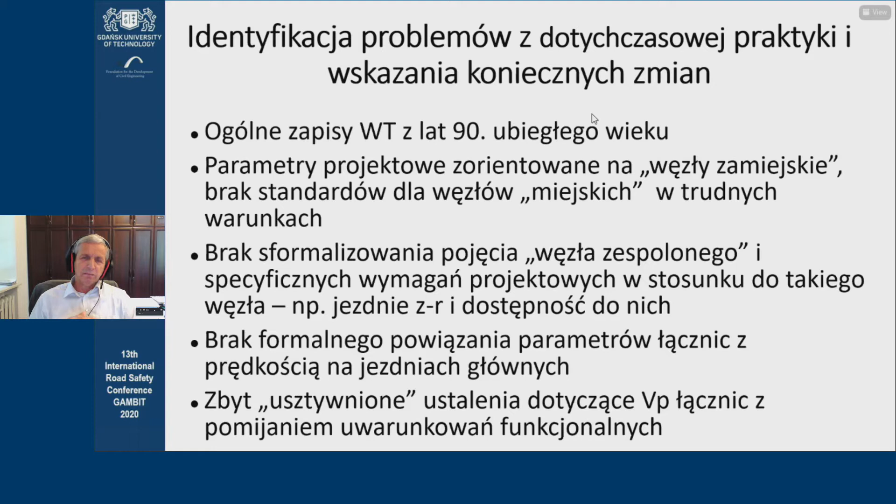So identifying the problems. Well, we really haven't had specific guidelines. Everything was based on knowledge from the 1990s. There were some design parameters, but we used the term of non-urban interchanges. There were no parameters for urban interchanges under difficult conditions. And when it comes to design speed on the ramps, the approach was really very rigid.

Selecting the type of interchange, well, there were some limitations on this. I mean, I don't see why we would stop people from designing interchanges on specific types of roads. And obviously, some boundary conditions have to be met, because what we don't want is a WB interchange at a crossing of an expressway and a motorway. But we thought that needed to be made more flexible in terms of selecting interchanges.

And then passability, again, just as with junctions, our idea is to include passability, including conditional passability. Just to give you an idea, if it's a single lane ramp, 6 meters wide, why would we make it wider if it's not needed? Sometimes it may be needed, sometimes not. So that shouldn't be a requirement.

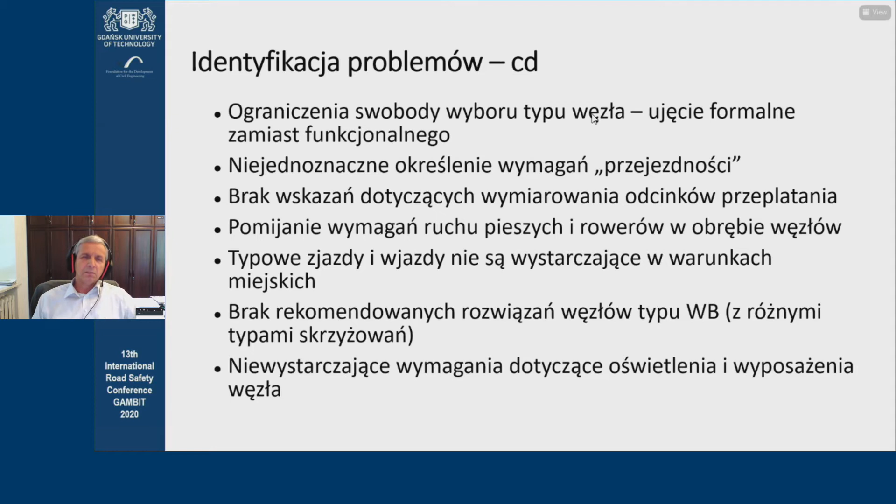And then weaving sections, it wasn't clear what dimensions they should have. And then on-ramps and off-ramps, I think what we've had, especially under urban conditions, wasn't sufficient. And lighting, that's another problem. So lots of problems, and it's based on our analyses and results of our audits, because we've conducted 32 projects, as I said, and that helped us to identify the problems and the deficiencies.

So now we have this structure. There are 3 volumes, with basic requirements in volume 1, where we list all the typical things like classification, elements, design data, etc. And then we have interchange elements and technical equipment. I'd like to tell you more about the basic requirements.

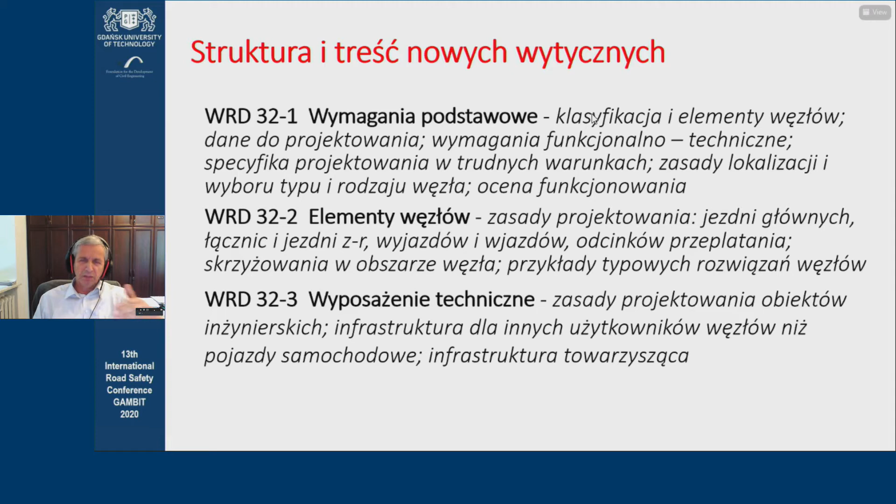This is really a very important volume, because we want to give designers more flexibility and more freedom. And this is why volume 1 is going to be really important for them, because it lists functional and technical requirements, which they will be able to translate into practice based on volume 2 or based on their own knowledge, as long as they meet the basic requirements. So those have to be met regardless. And volume 3 describes the technical devices or the equipment.

I've picked some elements to talk you through when it comes to the design requirements and the guidelines. Yesterday, Dr. Budzyński showed that before, so I have a different example. The complex interchange. This is one of the main problems, and whether any deviations are allowed here for short distances. So when it's a complex interchange, it's not just about the short distance, but what makes it complex is that it has common elements for 2 neighboring interchanges. So obviously, we say that it's okay to do this, but we have to be clear about the specific conditions.

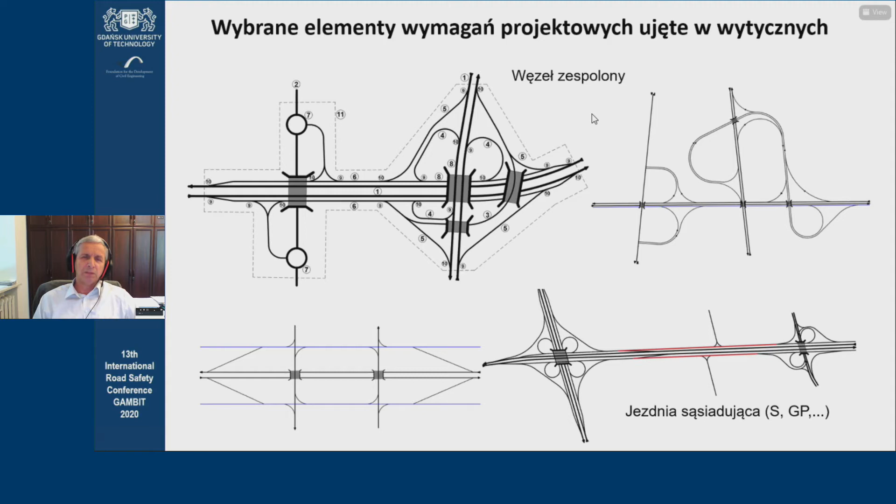But there's a new element there, which is what's called neighboring roadway or carriageway. So it's just as you can see here, this looks like more of a local road, but it moves into an interchange. So that's a departure from the orthodox approach, where you're not allowed to do interchanges like this. But now that we use the neighboring carriageway idea, then it's okay to do this, where we can have entries and exits going straight into a local road. It says SGP in the parentheses, and obviously there are specific requirements regarding speed, etc. So this is just one of the examples of what's new.

There's another term which is defined in detail, where the quality of traffic on junctions has to be assessed. What we think as the authors is really important about this is that on the one hand, designers are allowed more freedom and flexibility, but they are also required to prove, to demonstrate that whatever they come up with will be efficient. And this means we have to have specific capacity for entries and exits and weaving sections. While we don't want to be overly rigid with our requirements, we allow them some freedom. But the question is, are we going to reach the free flow parameters that we want to get?

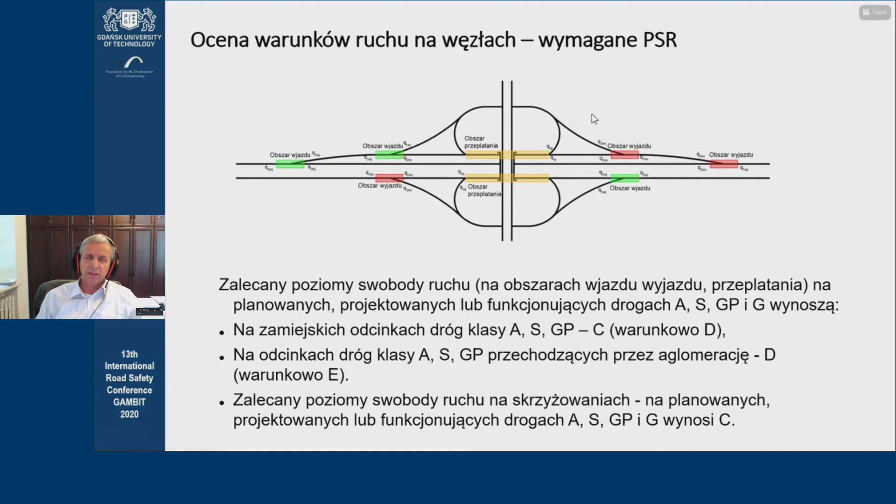The other thing is access to calculation methods. Some of them have already been developed under the RID program, but there are also other methods that we can tap into. But the main thing is a credible traffic forecast. That's a precondition here. So you have to be clear about the traffic. And number two, it's not just about applying the typical entry. Instead, you have to be able to demonstrate that your solution will ensure proper operation of the junction.

Next up, well, it's modification. I would say modification because the changes aren't that significant, but we are now using the new term that's speed to be designed, and this is for ramps. And again, we now have a new set of speeds, but it's also made clear that it could be up to 100 kilometers depending on the function of that link within the interchange.

Because what we don't want to do is to reduce the speed artificially. Let's say if this is a direct ramp and it's so well positioned that it can accommodate a higher speed, could be 80 kilometers, then it's okay to apply parameters for higher speeds, because the idea is to make it an efficient link.

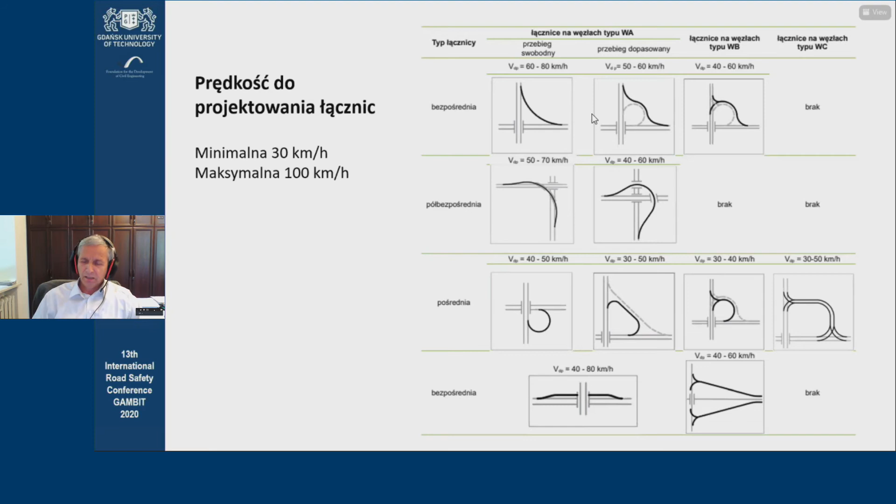And again, when we have difficult conditions, and that was defined today already, it's okay to reduce the speed on ramps, but there is one condition. This has to be tied in with the speed on the main carriageway. So that's another requirement. That way we will ensure that traffic there will be smooth.

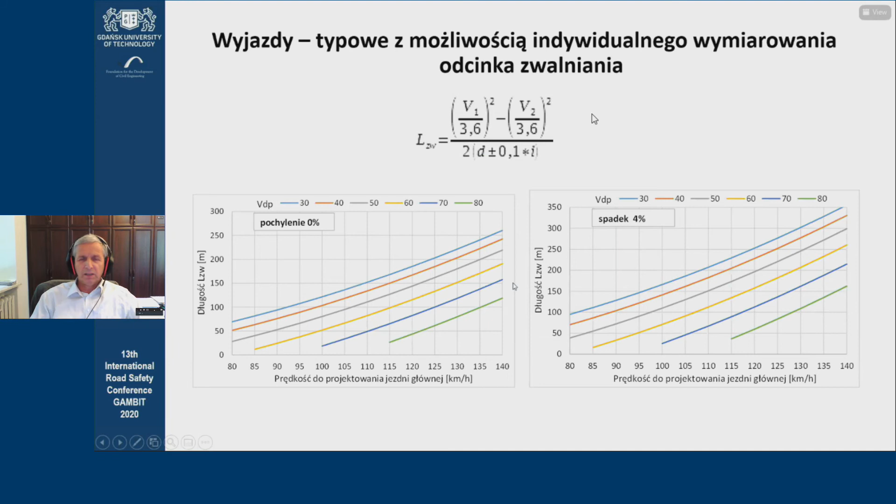So you can then maneuver with the time lost, but you can always look up the range in the guidelines, because what you don't want is a deceleration of 5 to 6 to 10 meters per second squared, because this should only be applied to unusual situations. But this could be down to 2.5 meters or even less, which gives the designer some discretion. So we know what the normal parameters should be, but you have some freedom to modify that.

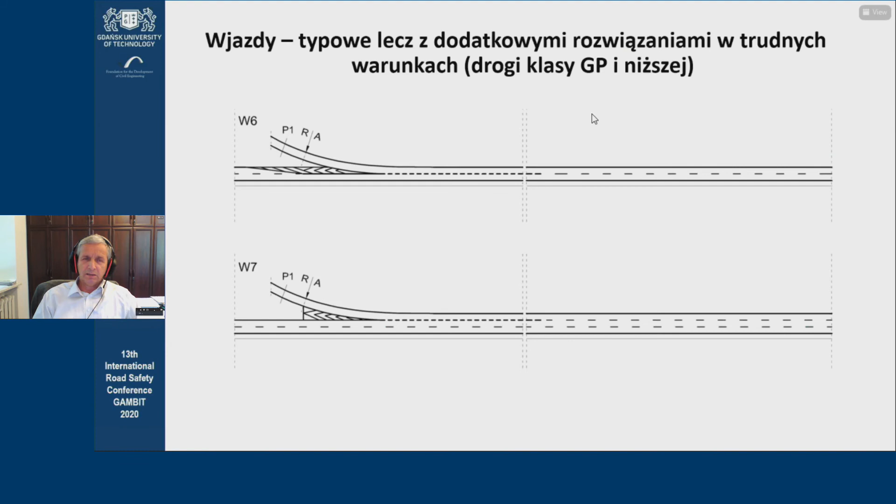I mentioned that having a set of typical entries and exits, that's just not enough, especially when we operate under difficult conditions. So entries can also be designed for the left-hand side as opposed to the right-hand side only. So that's obviously defined in the new guidelines, and it may be okay as well to design for the entry from the left-hand side. Well, obviously, this is just one example, and there are many more, but there's one other thing, which is quite a change compared to the previous guidelines.

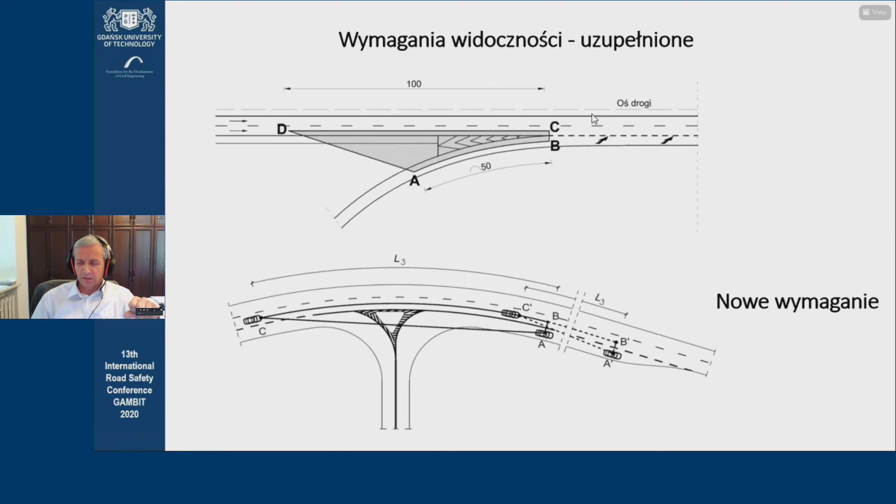That's sight distance. On approach, no change there, but there is a new sight distance requirement, which is along the entire merging lane. This is something that comes up when we do audits, when we do classes. So when you have interchanges on curves and limited visibility, you lose sight of where that lane is going. So this is a new requirement. We've defined the parameters for that, and that should help to increase the safety of interchanges.

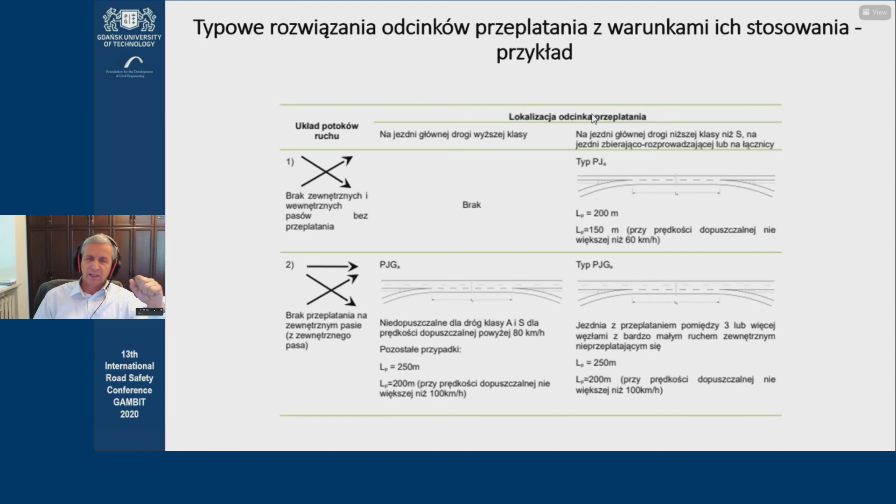Now, with this, we should be able to eliminate mistakes that are made when the weaving sections are too short, because that makes the interchanges more hazardous. When it comes to WB interchanges, the ramps were not properly designed, and one thing was ignored, which is the accumulation zone. So when there's signalization, obviously a queue will build up.

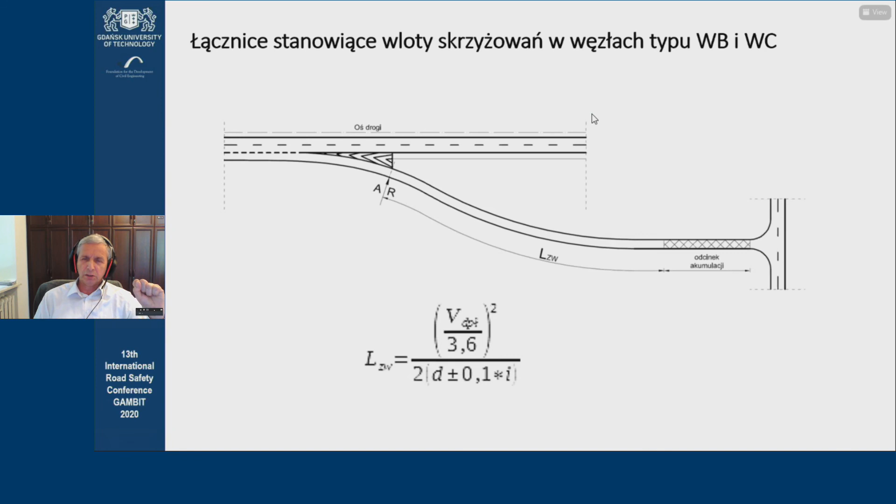But we have this requirement for the deceleration section to be dimensioned from the moment the exit begins. So we slow down from the initial design up until the end. And so we assume that the reduction is from the main carriageway to the ramp speed. And then we have to continue reducing the speed up until the section where queues build up. So that's now been made very clear, because by doing this, we can improve road safety. And there are also some limitations on what delays are allowed.

I only have a minute left. I'm measuring the time for myself. And I couldn't possibly talk you through all the elements.

And just as I said yesterday, this is what the Ministry of Infrastructure wants. We will have a round of consultations. We are going to have webinars, and obviously, when we do that, we will discuss the details of the new proposals. So I'm not giving you too much detail, whether it's myself or my colleagues, but obviously when we do the consultation, we will give you the details.

So the idea for the new guidelines is to offer standard solutions and allow non-standard ones. It's okay to use a catalog of standard solutions, but it's also okay to use your own discretion. The main idea is to improve safety, and as I said, we've eliminated some of the rigid solutions where whatever you design has to go through a checklist of functional requirements.

And we've added some new content, but there's a really very important thing in the new guidelines, because there are requirements for pedestrian and cycling traffic, because interchanges are also used in cities, and we haven't had any sections for pedestrians or cyclists there. And also the additional equipment, and that's described at length, but it's things such as traffic control using ITS. Well, thank you very much.